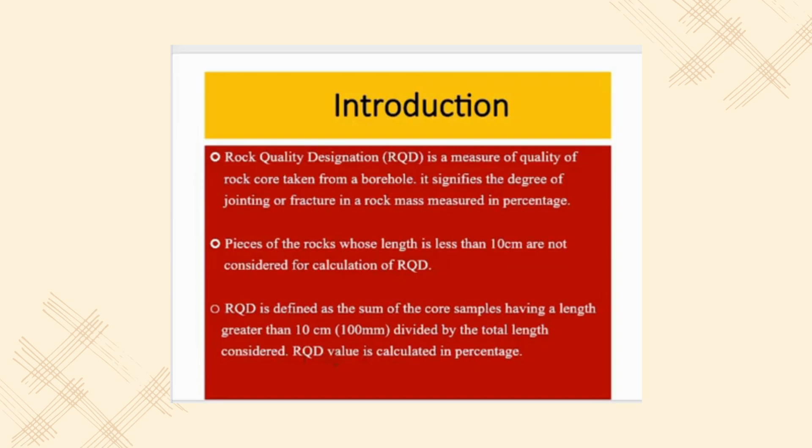Pieces of the rock whose length is less than 10 cm are not considered for calculation of RQD. RQD is defined as the sum of the core samples having a length greater than 10 cm divided by the total length considered or total core run. RQD value is calculated in percentage actually. So as you can see, this is the core recovered from a borehole. So first of all we just measure the length of this core.

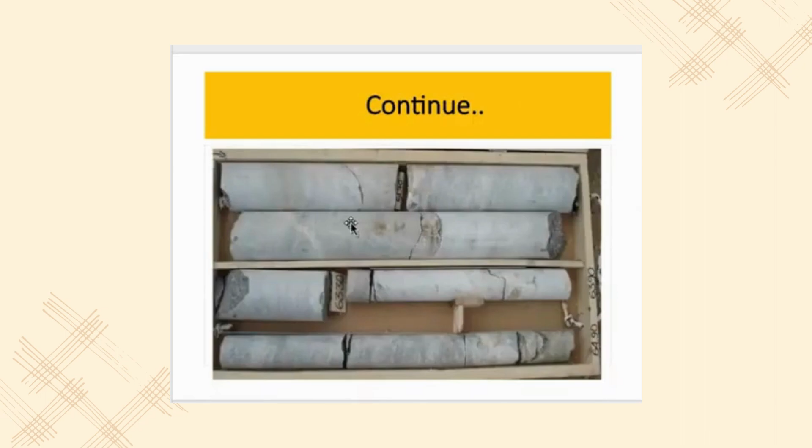Suppose the core is this one, what we have seen here. So the first length of the core is 38 centimeter, then 17 centimeter, then this portion is suppose fracture, so there is no core recovery, or the pieces of core are less than 10 centimeter, then 20 centimeter, and then 35 centimeter. This part is also less than 10 centimeter, so we are not considering this part for calculation of RQD. Now see here, this is the formula to find out RQD.

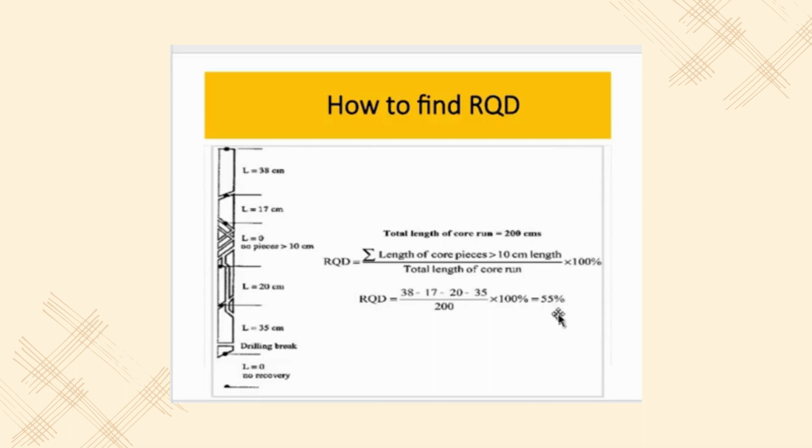So first of all we just find out the core recovery. So core recovery is equal to total length of rock recovered divided by total core run length into 100. So suppose we have recovered total length of rock is 25 centimeter, 20, 25, 19, 6, 8 and 12 centimeter. So this is the total of 115 centimeter, and the total core run length is 120 centimeter. So 115 divided by 120 into 100 is equal to 96%. So this is the core recovery, actual core recovery.

Now we should find the rock quality designation or RQD. So the formula of RQD is sum or total length of the sound pieces. Sound pieces means greater than 10 centimeter, divided by total core run length into 100. So this is the core recovery, but what we have found greater than 10 centimeter is considered for RQD calculation.

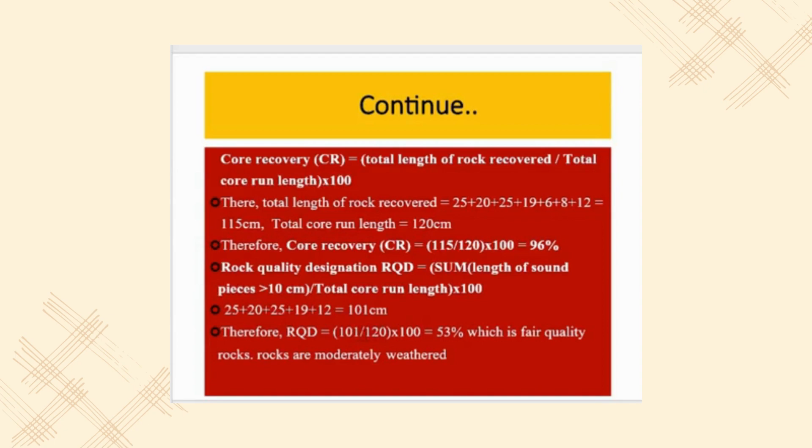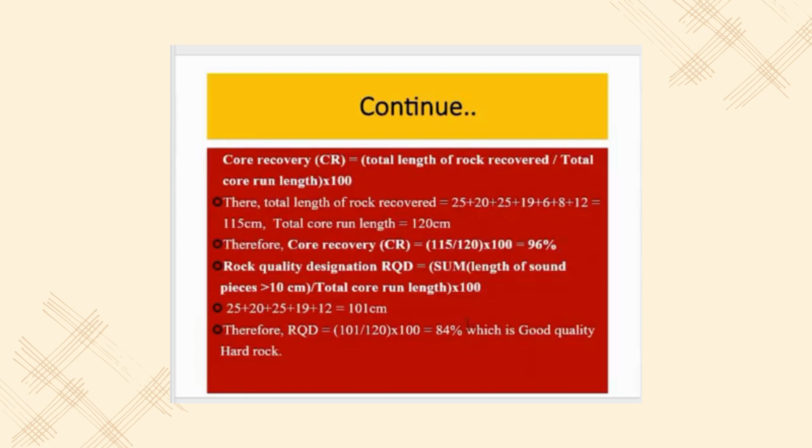So 25, 20, 25, 19 and 12; 6 and 8 is not considered for RQD calculation because this is less than 10 centimeter. So this is the total of 101 centimeter, and the total run length is 120. So 101 divided by 120 into 100, 84%. So this is the RQD percent for this core run length. So 84% is actually a good quality hard rock.

Now see here the table that defines the RQD percentage. So if the RQD percentage is less than 25%, the rock is very poor or completely weathered rock. If the RQD is 25 to 50%, the RQD is poor. If the RQD is 51 to 75%, this is fair. 76 to 90 is good, and 91 to 100% is very good or fresh rock.

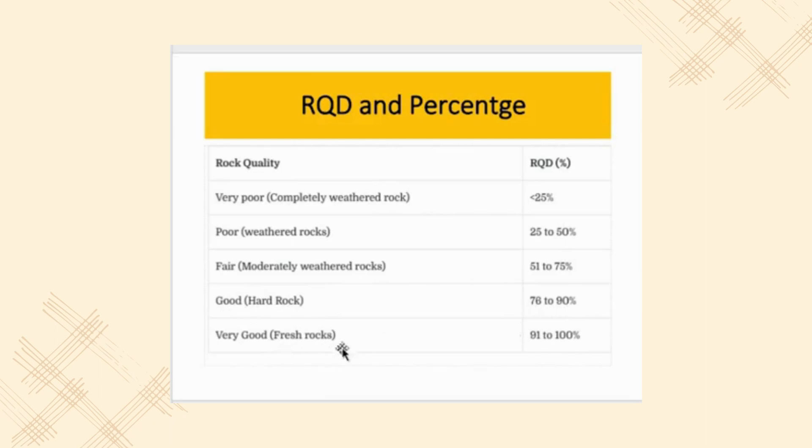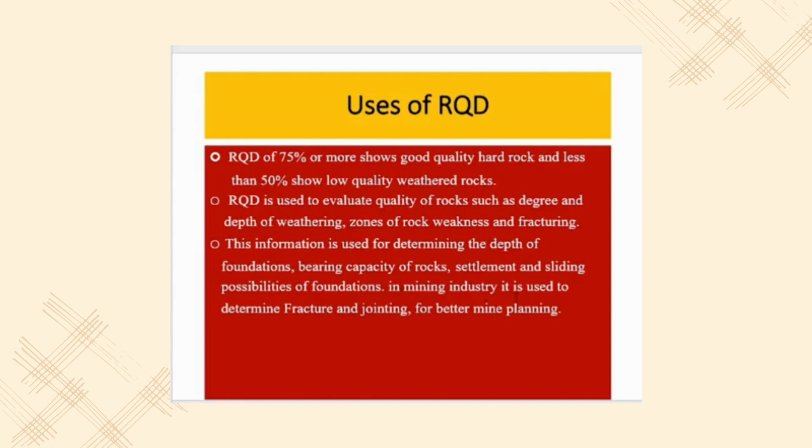Uses of RQD. So RQD of 75% or more shows good quality hard rock, and less than 50% shows low quality weathered rocks. RQD is used to evaluate the quality of rocks such as degree and depth of weathering, zones of rock weakness and fracturing. The information is used for determining the depth of foundations for tunneling, hydropower and other sectors, bearing capacity of rocks, settlement and sliding possibilities of foundation. In mining industry, it is used to determine fracture and jointing for better mining planning.

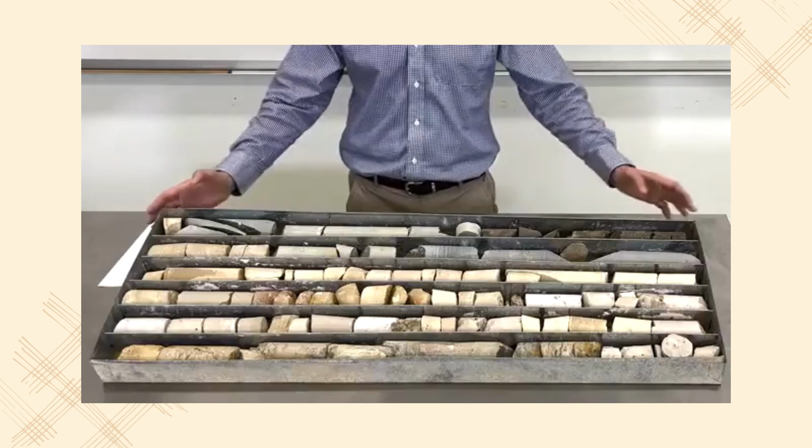This video will be about rock quality designation index, or what we also briefly call RQD. So this is a very important value. We use it for almost all classification systems. I'm going to show you how we can calculate this RQD, and for that we will just have a box with core samples, the one that you can see here. And you'll see there are different types of rocks. These black ones, very weathered, this is argillite, and we have this sandstone.

So I'm going to calculate RQD for this particular set of rocks, which is 1 meter. So this is the total run of this rock, which is sandstone. And to calculate RQD, we need to measure the size of each of the cores here. You see some of them are bigger than others, some of them are very small. So we will just need to actually measure the size of each of the rocks. And if it's 10 centimeters or greater, we're going to use it for calculation of RQD. If it's less than 10 centimeters, then we will just ignore those samples.

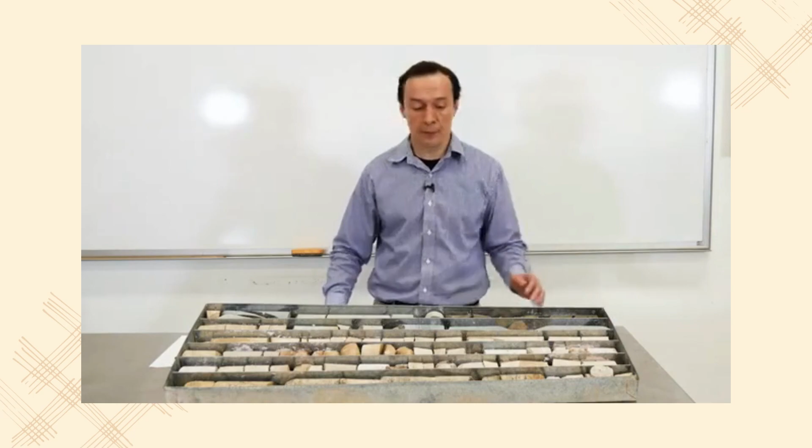Pretty simple. So we'll start from the left, and I have a ruler here. So this first piece, it's about 75 millimeters, which is less than 10 centimeters. We're going to ignore it. Next one is about 90 millimeters, which is 9 centimeters. Still, it's less than 10 centimeters. We'll ignore it. This sample, you see, it's broken. It's split, but the core is actually longer than 10 centimeters. You see that one. And we're going to include it in the calculations of RQD. That will give us 190 millimeters, which is 19 centimeters, right?

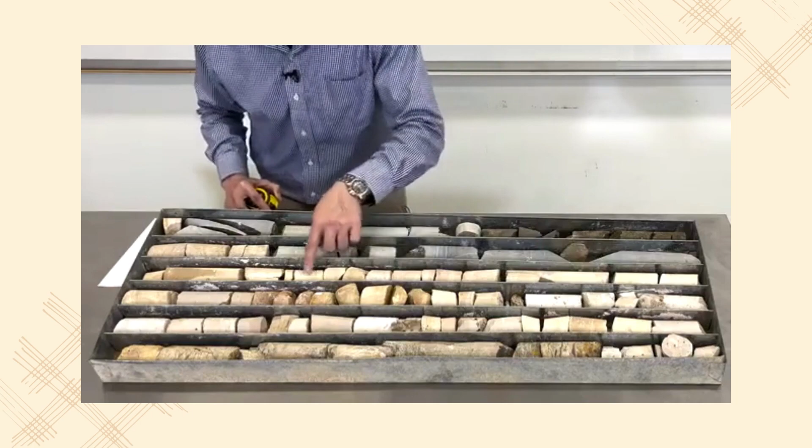So you see the next samples, this one is about 6.5 centimeters. This is even smaller, 5 centimeters. So we're not going to consider this one. So we'll consider this one, which is 190 millimeters. And then this small one. This one, close to the last, is a pretty big one. And when I measure this one, it will give approximately 145 millimeters.

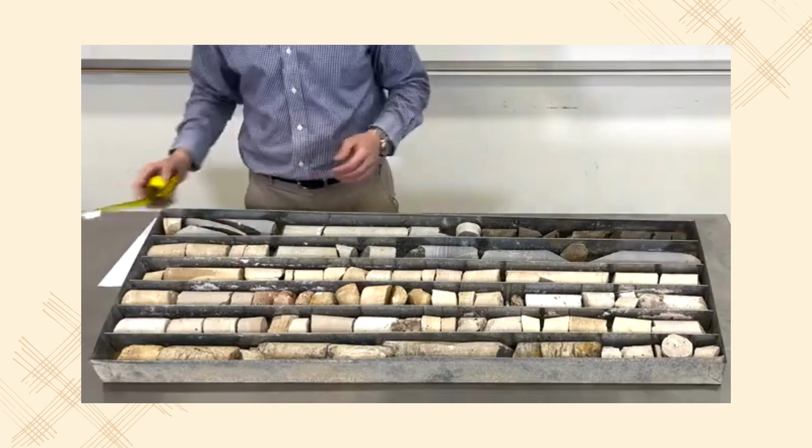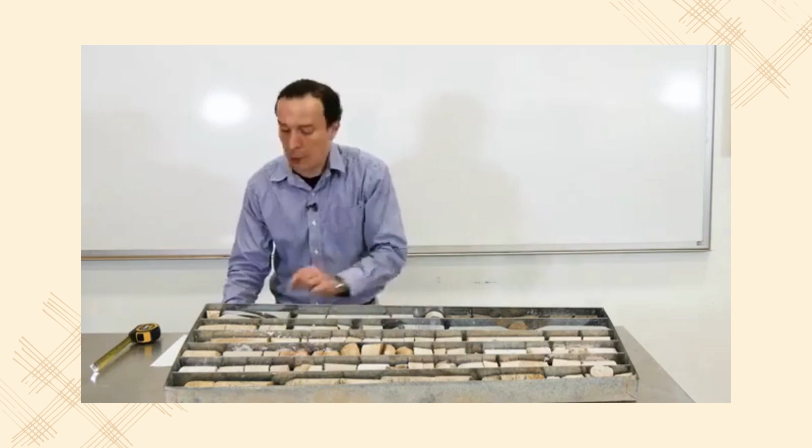So what we do next is we're going to sum the length of this core and this one, and we'll divide by 1 meter, because that's 1 meter of the total run of this rock. So which is 190 plus 145 millimeters divided by 1,000, which is 1 meter. And then we will change it to percentage, multiply by 100. It will give us approximately 33.5%, which is RQD.

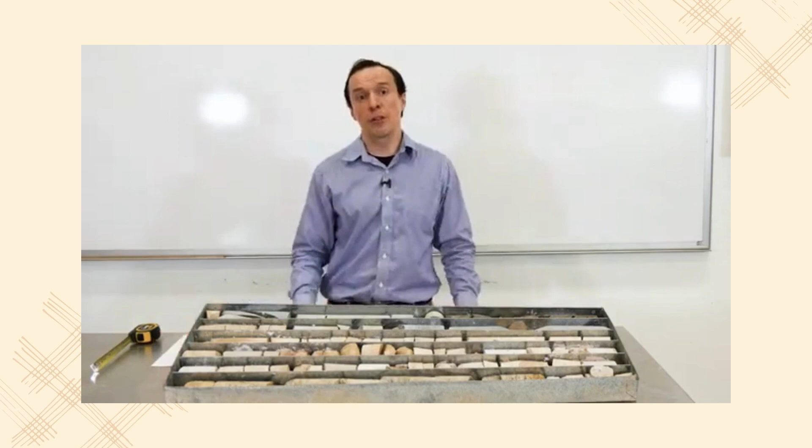It's actually pretty low. What we would like to see is that there are more pieces which are longer than 10 centimeters. That will increase RQD. We'd like to see about 90–95%. That will be for really good quality rock.